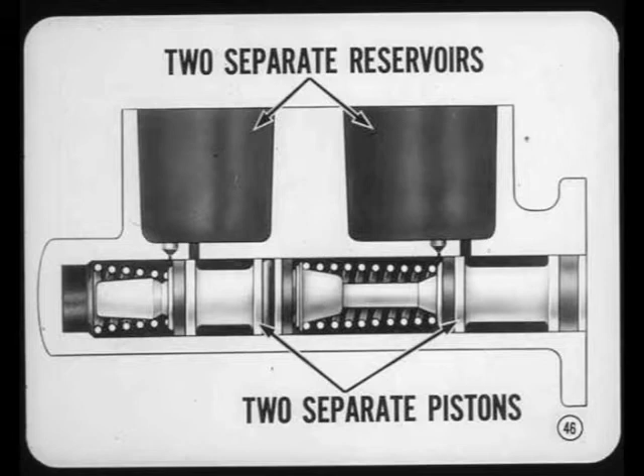However, a single cylinder bore is used, and the two separate pistons operate in tandem. It's easier to keep things straight if we call the rearward piston the primary piston, because it's actuated directly by the brake pedal. Besides, the primary piston supplies pressure to the front brakes, where more of the braking is done.

The piston at the forward end of the master cylinder is the secondary piston. In normal operation, hydraulic pressure from the primary piston operates the secondary piston. The secondary piston supplies pressure to the rear brakes.

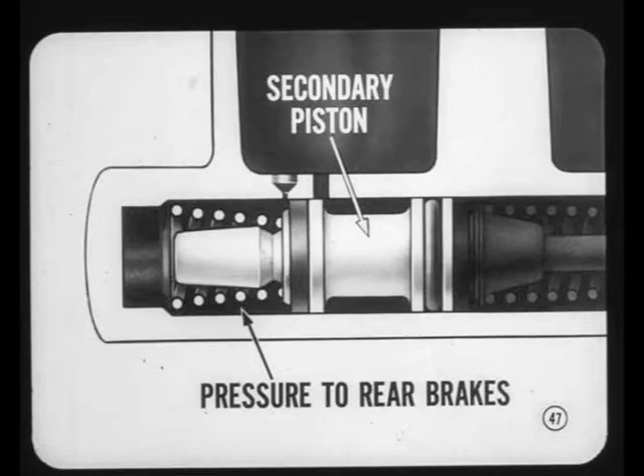Here's how those pistons work. When the brakes are applied, the weaker secondary piston spring is compressed slightly by the stiffer primary piston spring. The secondary piston is pushed forward, and the secondary compensating port is closed off. Pressure starts to build up in the forward chamber.

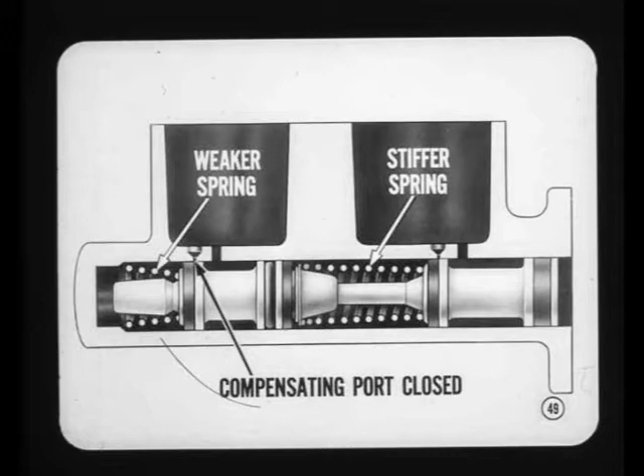At the same time, the primary compensating port has also been closed off. The right amount of fluid is trapped in front of each piston, and pressure is developed in both the primary and secondary chambers. You still haven't told me what's different about the master cylinder for these brakes.

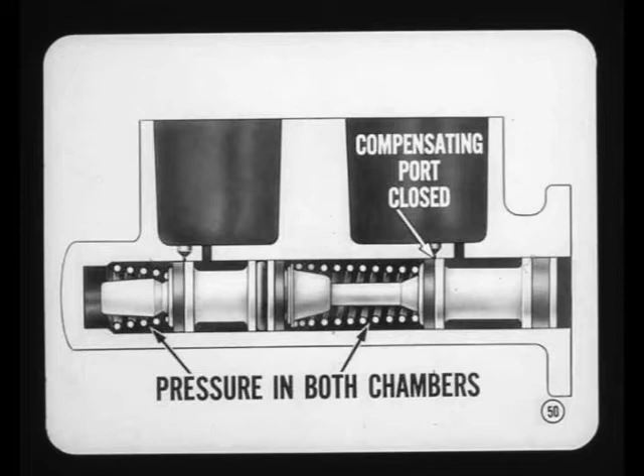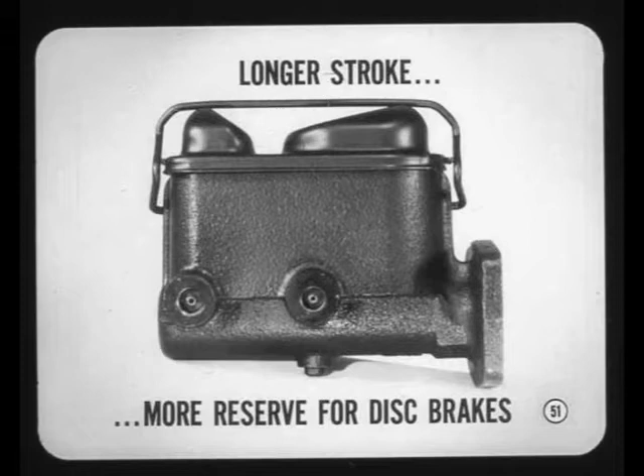The master cylinder for the single piston disc brake has a longer stroke and greater capacity than most of our other master cylinders. What's more, the division of capacity between primary and secondary systems provides more fluid reserve for the front disc brakes. Now, here's the rub.

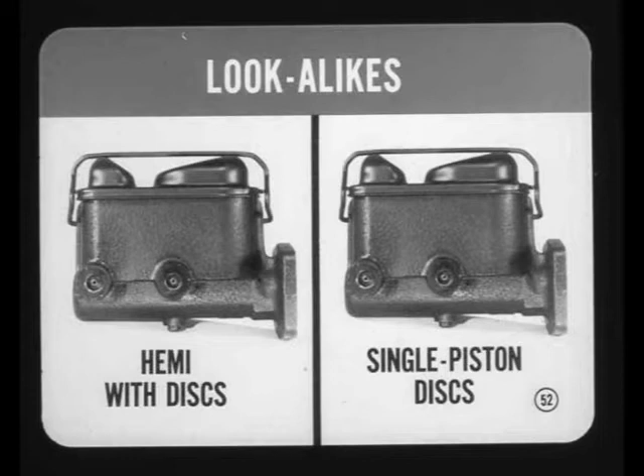The master cylinder for Coronet or Belvedere equipped with a Hemi engine and disc brakes looks exactly like the master cylinder used with single piston disc brakes. But they must not be interchanged. As a matter of fact, neither the pistons nor the assembly should be interchanged. So don't mix up the hardware.

Thanks, Tech. And while we're on the subject of master cylinders, here's a tip worth remembering. If you ever run into a case of brakes dragging because the master cylinder won't compensate, don't forget to check the stoplight switch. If it isn't properly adjusted, it will keep the pedal from returning far enough to open the compensating ports. I'll remember that.

Now, is there anything else different about the hydraulic system for these brakes? There are a couple of differences, so let's review the rest of the system. As you probably know, the residual valve for the rear brakes is located in the forward or secondary outlet of the master cylinder. No residual valve is used in the primary or disc brake outlet.

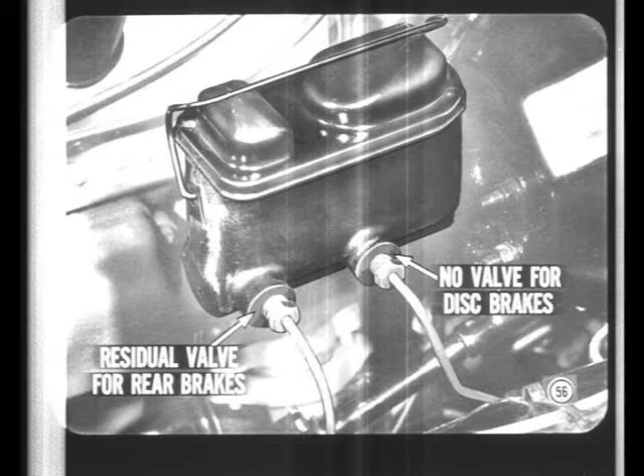Why do we need a residual valve? The residual valve maintains a light pressure in the rear brake cylinders. This keeps air from being sucked past wheel cylinder piston cups when the brakes are suddenly released. Residual pressure expands piston cups tight against the cylinder wall.

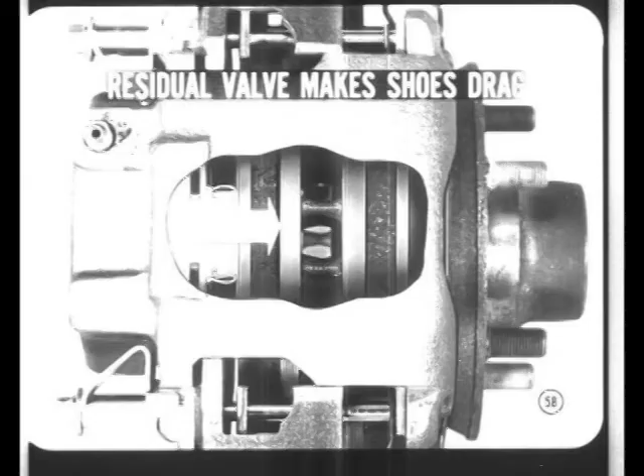A residual valve must not be installed in the primary outlet. Since disc brakes have large pistons and no shoe return springs, residual pressure in the primary lines would make the disc brake shoes drag and wear out prematurely.

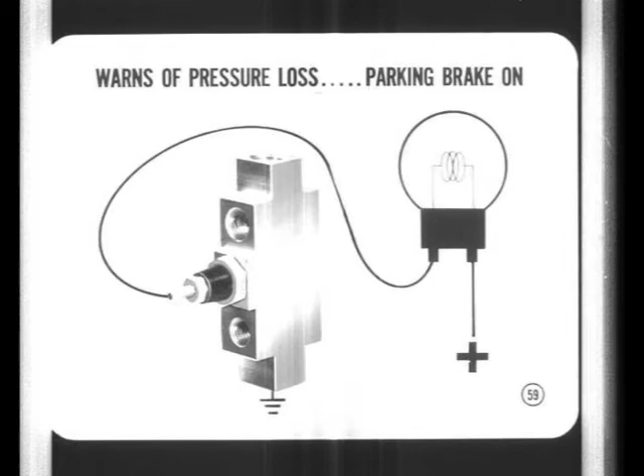And now let's look at this warning light switch. The brake warning light serves a dual purpose. In addition to warning the driver if pressure is lost in either the primary or secondary hydraulic system, it warns him if the parking brake is on as soon as the engine is started.

The primary brake line from the master cylinder is connected to one end of the switch, and a line for the front disc brakes is connected at the same end. With the single piston disc brakes, one outlet at this end of the switch is plugged, and you'll see why a bit later.

The secondary master cylinder line is connected at the other end, as well as a line leading to the rear drum brakes. At this end of the switch, one outlet is plugged on all applications.

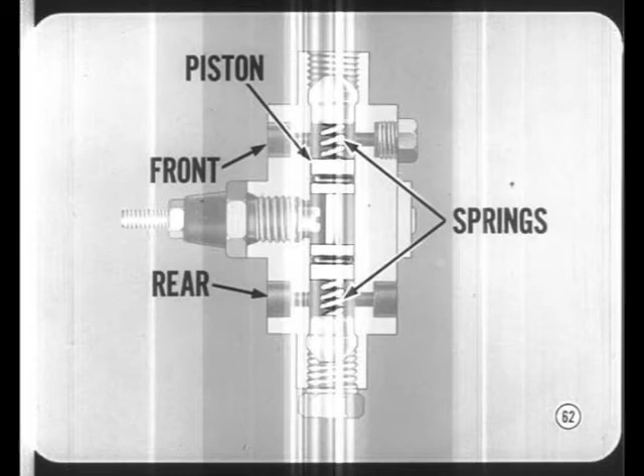Now, inside the switch, a barbell-shaped double-headed piston with an O-ring in each end separates the front brake hydraulic system from the rear brake system. Two small coil springs keep the piston centered as long as the pressure is the same in both systems.

If pressure is lost in one system, for example the front brakes, pressure in the rear brake system pushes the piston off center. As soon as the piston moves far enough to touch the ground contact, the warning light comes on.

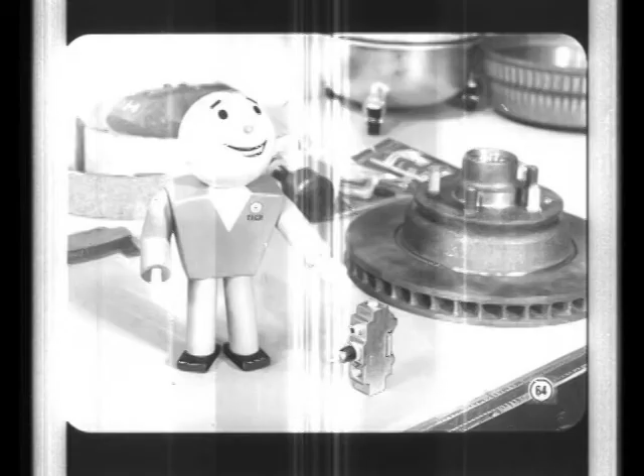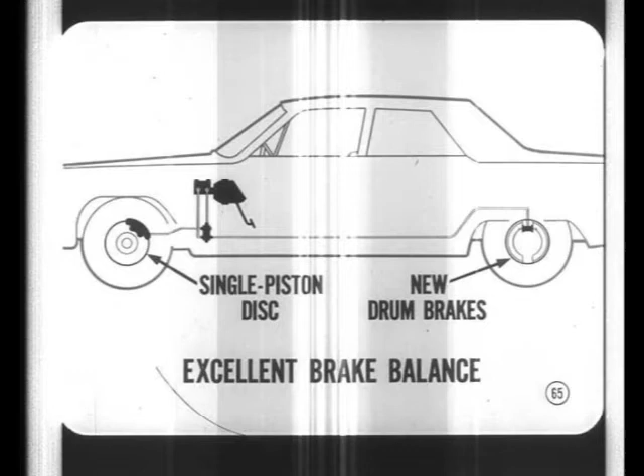The springs in the switch are quite stiff, so minor variations in pressure won't turn the light on. For example, residual pressure in the secondary system will not cause the light to come on even when primary system pressure is released. Although drum brakes have different characteristics than disc brakes, the single-piston disc brakes are designed to give excellent balance with the new rear drum brakes.

However, on icy or slippery roads, it is desirable to reduce front-wheel braking. That's where the metering valve comes in. It cuts off pressure to the front brakes in the range from about 10 psi to about 115 psi. Just how does that valve work?

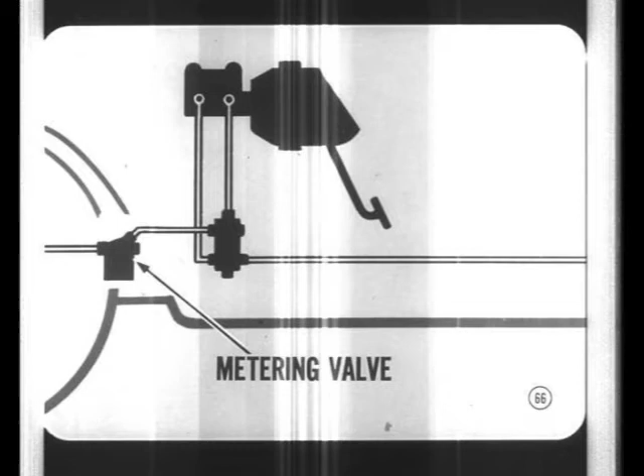With this brake setup, there's only one brake line from the warning light switch to the metering valve. That's why the other front brake outlet in the warning light switch is plugged. There are two lines leading from the metering valve, one to each front brake. Inside the metering valve, there is a check valve and a valve seat. The valve seat is mounted in a valve plate. A spring holds the valve plate closed.

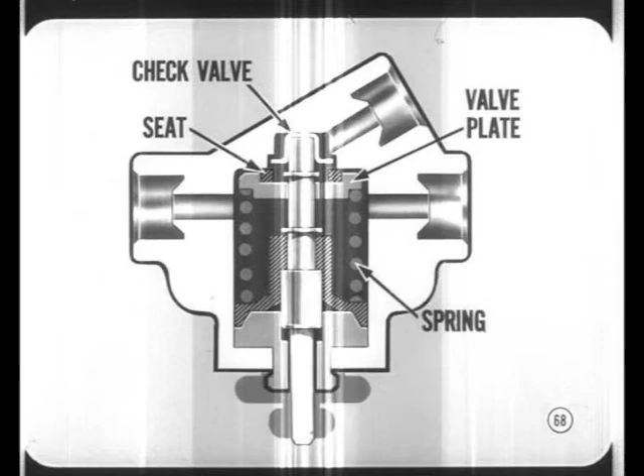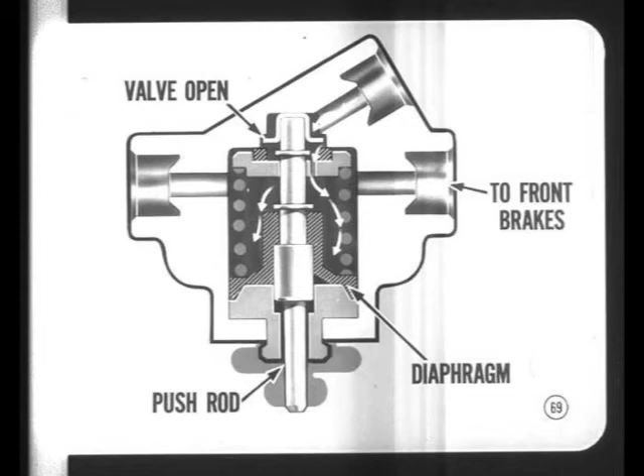The check valve in the upper end of the push rod is normally opened to ensure complete release of the disc brakes. As soon as the brakes are applied, pressure pushes on the diaphragm at the lower end of the push rod. It only takes about 10 psi to move the diaphragm and push rod far enough to seat the check valve. Closing the check valve cuts off pressure to the front brakes.

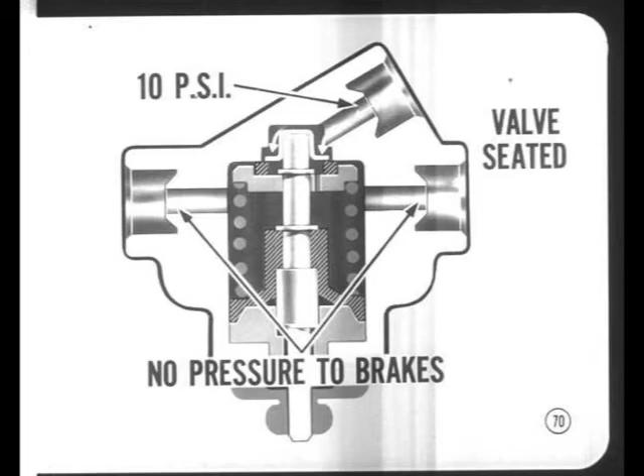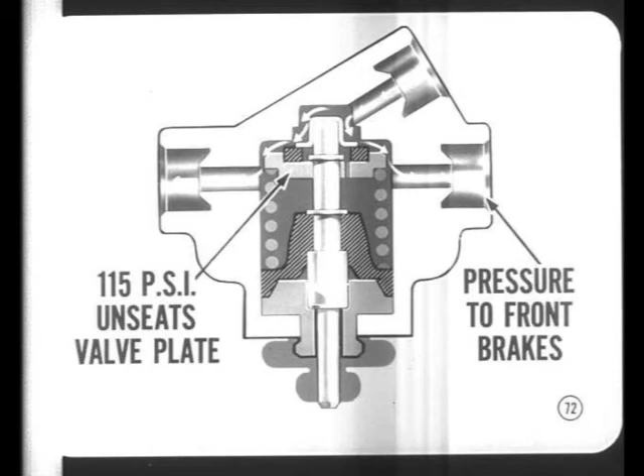This provides good braking and steering control under slippery operating conditions because it reduces the likelihood of front wheel skid. When master cylinder pressure gets up to about 115 psi, the push on the check valve and valve plate overcomes the valve spring and unseats the valve plate. From about 115 to 500 psi, the pressure difference between the primary and secondary is gradually reduced until pressure to front and rear brakes is the same.

What's the difference between a metering valve and a proportioning valve? A proportioning valve reduces pressure to the rear brakes to delay rear wheel skid on hard braking. The metering valve holds off pressure to the front brakes under light braking conditions. It's sometimes called a hold-off valve.

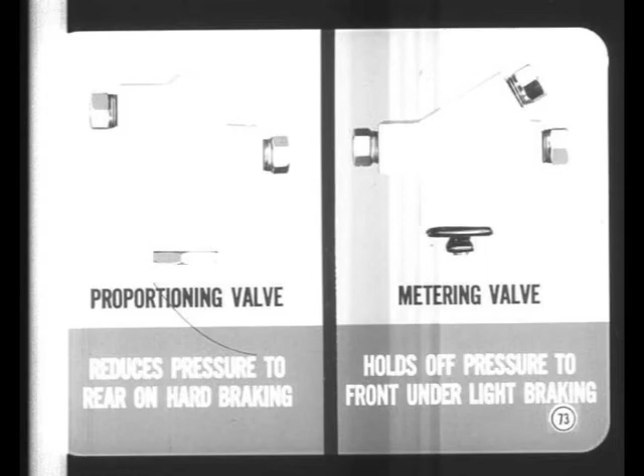To quick check the metering valve, apply the brakes gently. A very slight bump will be felt at about 1 inch of pedal travel. This signals the opening of the valve plate, admitting flow to the front brakes. If you have a helper, watch the end of the metering valve push rod as the brakes are applied. The rod should move out of the valve slightly as the brakes are applied and move back into the valve as the brakes are released.

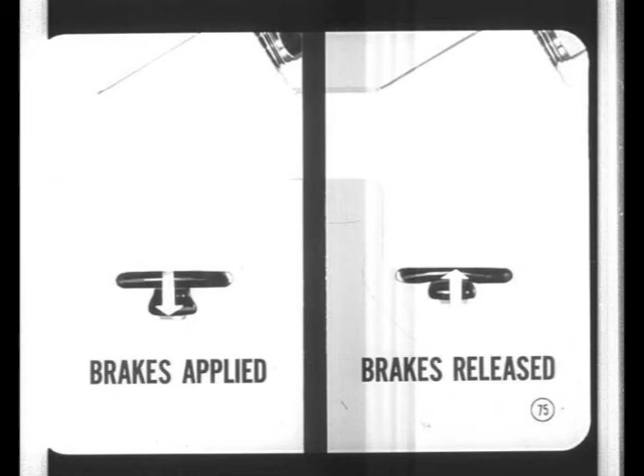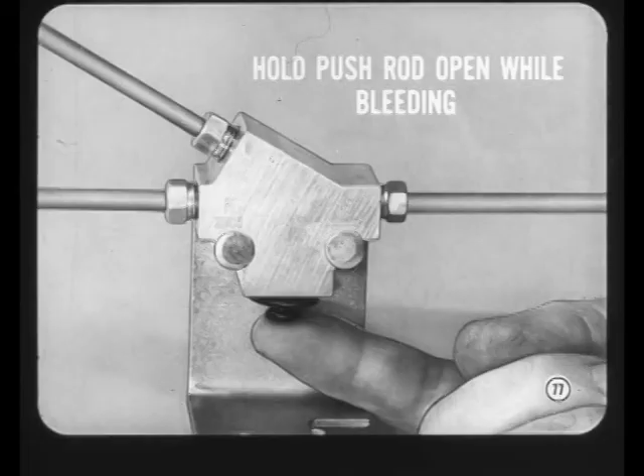And here's something else to remember. The metering valve affects the procedure for pressure bleeding the front brakes. Since the pressure bleeder is usually operated at about 30 psi, the metering valve will close and the front brakes won't bleed. If you use a pressure bleed tank, hold the metering valve push rod up while bleeding. Do not force the push rod beyond its normal open position, and never use a block or a clamp to hold the valve open. Here's why.

If you block the valve open and apply the brakes, the block will keep the diaphragm extended. As a result, full pressure will rupture the diaphragm. If that happens, the valve will be ruined and you'll lose the fluid for the front brakes.

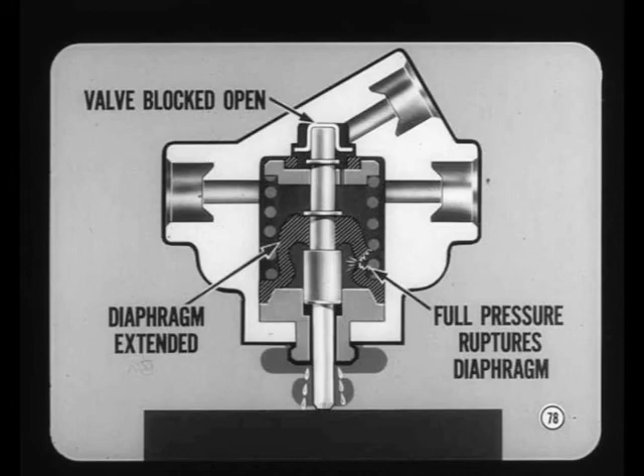You'll be glad to know that this year we have a new parking brake cable assembly. It has stiffer return springs and cable lubrication has been improved. This new cable ensures parking brake release and reduces the possibility of rear brake drag. It can be used on previous models, providing you always replace both rear cables.

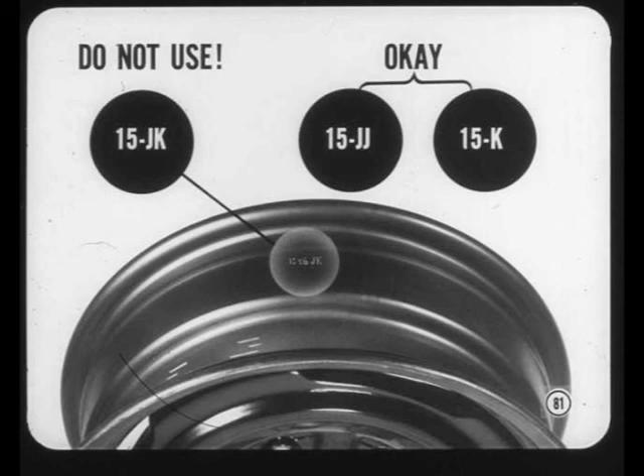One last warning before we sign off. With these new disc brakes, never use a 15JK wheel. You must use either a 15JJ wheel or a 15K wheel.